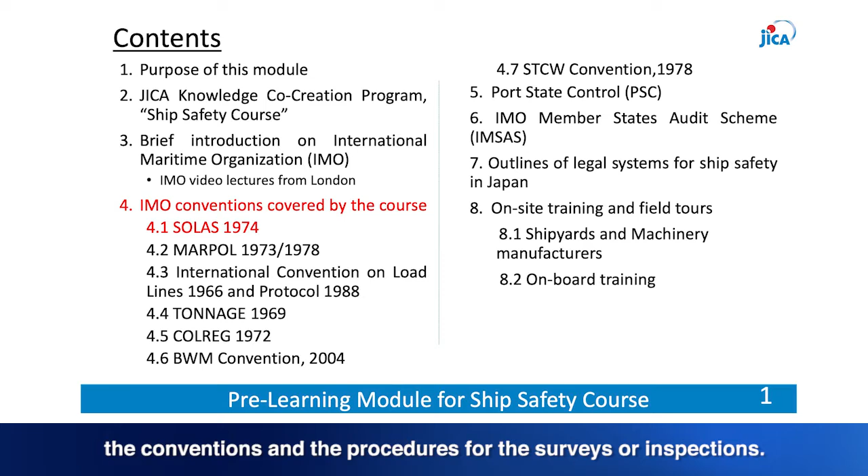Section 4 is about IMO conventions covered by the course. The background, objectives, and outlines of these conventions are briefly explained. Classroom lectures in JICA Yokohama are mostly presented by experienced surveyors or inspectors, who will provide detailed explanations regarding the requirements of the conventions and the procedures for the surveys or inspections. This part, Part 2A of the module, covers the first half of chapters 1, 2.1, 2.2, and 3 of SOLAS 1974.

4.1 SOLAS 1974, International Convention for the Safety of Life at Sea 1974. SOLAS is the most important convention for ship safety. The picture shows the SOLAS book, which was newly published by IMO. In classroom lectures, we shall be using this book. JICA will prepare the rulebooks containing IMO conventions for all participants. The slide also provides an overview of Section 4.1 of SOLAS 1974.

4.1.1 Background. 4.1.2 History of Amendments to SOLAS 1974. 4.1.3 Outline of SOLAS 1974.

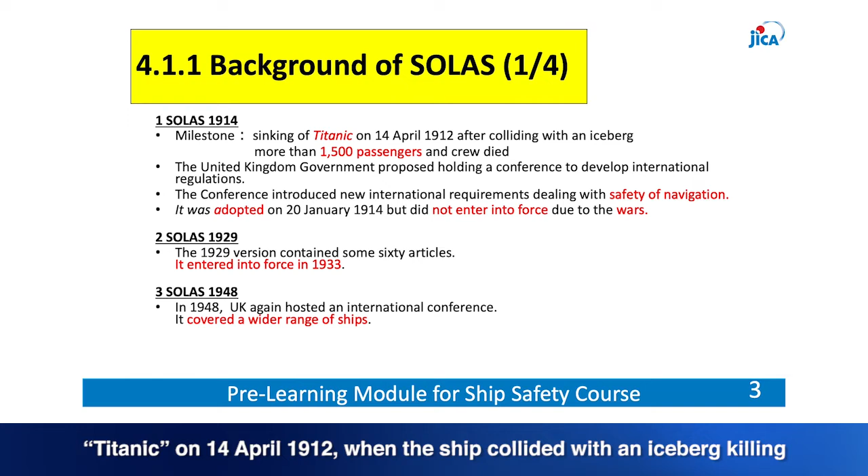This slide provides a brief historical background of SOLAS. The first version, SOLAS 1914, was introduced after the sinking of Titanic on 14 April 1912, when the ship collided with an iceberg, killing more than 1,500 passengers and crew. The government of the UK proposed holding a conference to develop international regulations.

The conference introduced new international requirements relating to navigational safety. Although the convention was adopted on 20th January 1914, it did not enter into force due to the wars. Many lives were lost in the First World War. However, it ushered in numerous technological innovations for ship safety and led to the introduction of a new convention, the 1929 version of SOLAS.

It contained some 60 articles and came into force in 1933. The Second World War further introduced several technological innovations. In 1948, the UK hosted an international conference to formulate a new convention that covers a wider range of ships, such as cargo ships. In order to keep up with the rapid developments of the industry, the 1960 convention was adopted on 17 June 1960 and entered into force on 26 May 1965. The intention was to keep the convention up to date.

However, the amendment procedure proved to be very slow, as the amendment procedure adopted was the so-called explicit style. It needed to be accepted by 2/3 of the parties before entering into force.

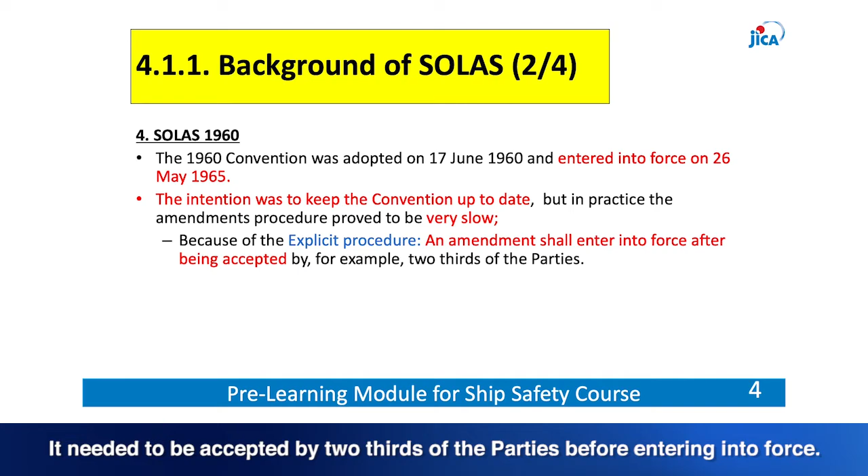5. SOLAS 1974. The SOLAS 1974 conference was held in London and attended by 71 countries. The current version of the convention was adopted there. It is unlikely to be replaced by a new instrument, because it includes a new procedure, so-called tacit amendment procedure, in Article 8. The tacit acceptance procedure is designed to ensure that changes could be made within a specified short period of time. Instead of requiring 2/3 of the parties, the tacit acceptance procedure provides that an amendment shall enter into force on a specified date unless objections to the amendment are raised by an agreed number of parties.

Consequently, the 1974 convention, which entered into force on 25 May 1980, has been updated and amended on numerous occasions. However, please note that this tacit acceptance procedure is adopted for amendments to the Annex other than those on Chapter 1. These chapters provide various technical standards, and they have been maintained and updated by this amendment procedure. On the other hand, the articles of the Convention and the regulations of Chapter 1 shall not be amended by the tacit acceptance procedure, and they are still under the explicit acceptance procedure, which needs 2/3 of the member states' acceptance to become effective.

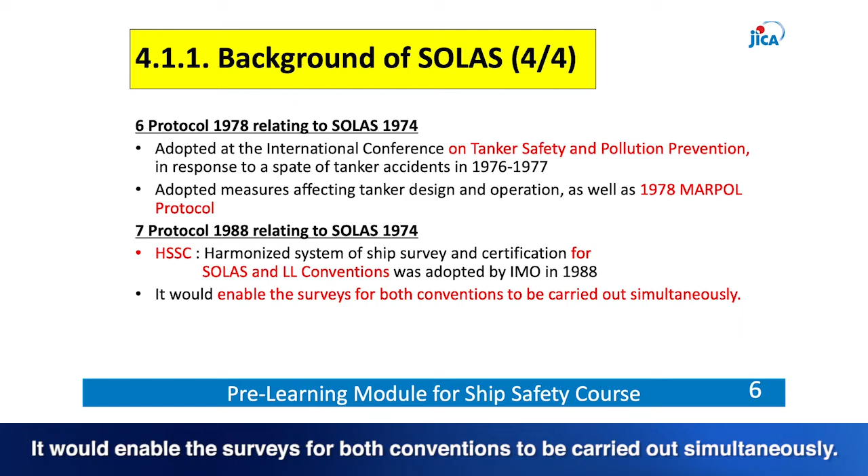The Protocol 1978 relating to SOLAS 1974 made numerous important changes to Chapter 1, including the introduction of an unscheduled inspection system, mandatory annual surveys, and the strengthening of port state control requirements. The Protocol 1988 relating to SOLAS 1974 is the protocol that was introduced to harmonise the survey and certification system of SOLAS and the Load Line Convention. It would enable the surveys for both conventions to be carried out simultaneously.

Let us examine some of the ones indicated in red. The 1983 amendment included major changes to life-saving appliances and introduced the IBC Code, International Bulk Chemical Code for chemical tankers, and the IGC Code, International Gas Carrier Code for gas carriers.

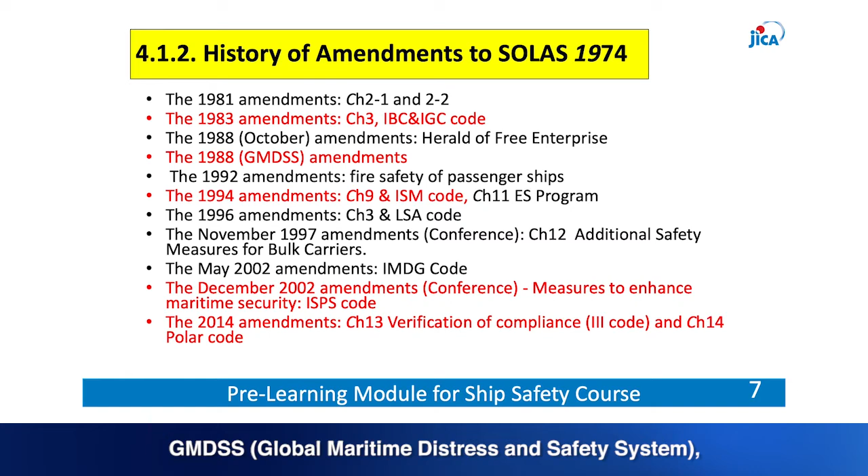The 1988 amendment introduced GMDSS, Global Maritime Distress and Safety System, which replaced traditional radio equipment that used Morse code.

The 1994 amendment introduced the ISM Code, International Safety Management Code. The 2002 amendment introduced the ISPS Code, International Code for Security of Ships and of Port Facilities, in response to the September 11 attacks in the United States.

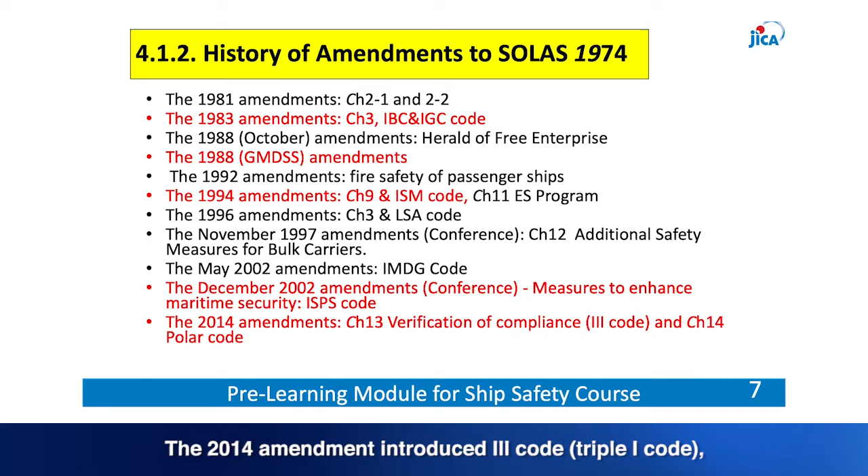The 2014 amendment introduced the III Code, IMO Instrument Implementation Code for IMO Member States Audit Scheme, and the Polar Code for ships operating in the Antarctic and Arctic.

Let me remind you about the amendment procedures again. The articles and the regulations of Chapter 1 shall not be amended by the tacit acceptance procedure, but by the explicit acceptance procedure, which needs acceptance by 2/3 of the parties, because it is designed to maintain the basic structure of the Convention. Chapter 1 provides general provisions for the annex of this Convention. All other chapters provide various technical requirements.

Article 8 of SOLAS 1974 may be considered a grandfather clause. As it states, any amendment to the present convention made under this article, which relates to the structure of a ship, shall apply only to ships whose keels are laid on or after the date on which the amendment enters into force.

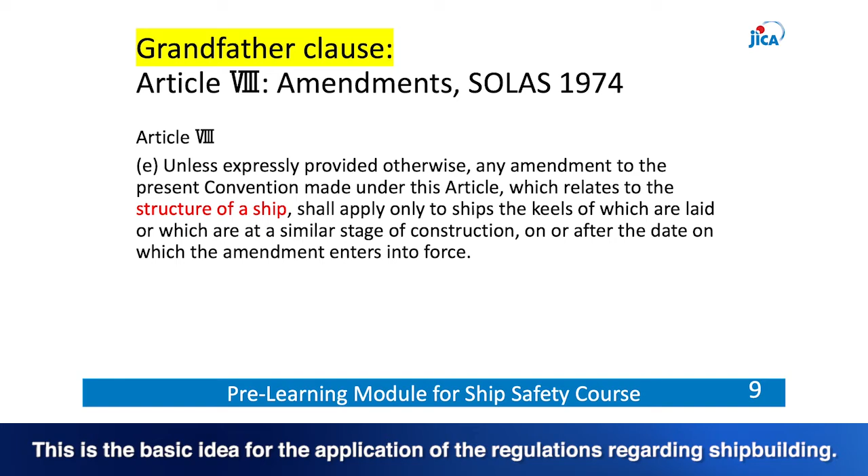In other words, the amendments to the construction shall not apply to ships which were built before the date. The previous provisions relating to the structure of the ship are still applicable to ships built before that date. However, new amendments to equipment or fitting may apply to ships which were built before the date. This is the basic idea for the application of regulations regarding shipbuilding.

4.1.4 SOLAS Chapter 1, General Provisions. Chapter 1 provides general provisions for the annex of this convention. The slide shows the structure as follows. Part A: application of the convention and definitions of the words used in the regulations.

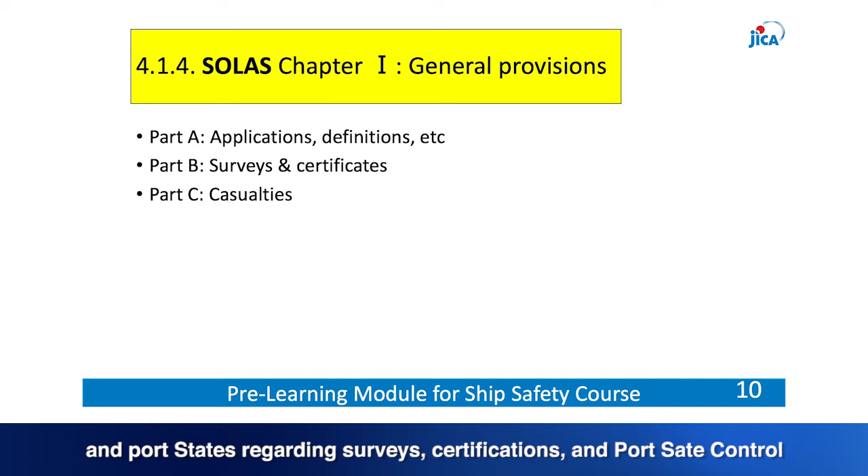Part B: surveys and certification system, which provides the duties of flag state administrations and port states regarding surveys, certifications, and port state control. Part C provides casualty investigation as a duty of each administration.

Regulation 1, Application. Unless expressly provided otherwise, the present regulations of the Annex apply only to ships engaged in international voyages. Regulation 2 provides definitions.

Please note that these are important definitions. A passenger ship is a ship which carries more than 12 passengers. A cargo ship is any ship which is not a passenger ship. A tanker is a cargo ship constructed or adapted for the carriage in bulk of liquid cargoes of an inflammable nature. A fishing vessel is a vessel used for catching fish, whales, or other living resources of the sea.

New ship means a ship the keel of which is laid, or which is at a similar stage of construction, on or after 25th May 1980. Existing ship means a ship which is not a new ship. Anniversary date is the day and month of each year which corresponds to the date of expiry of the relevant certificate.

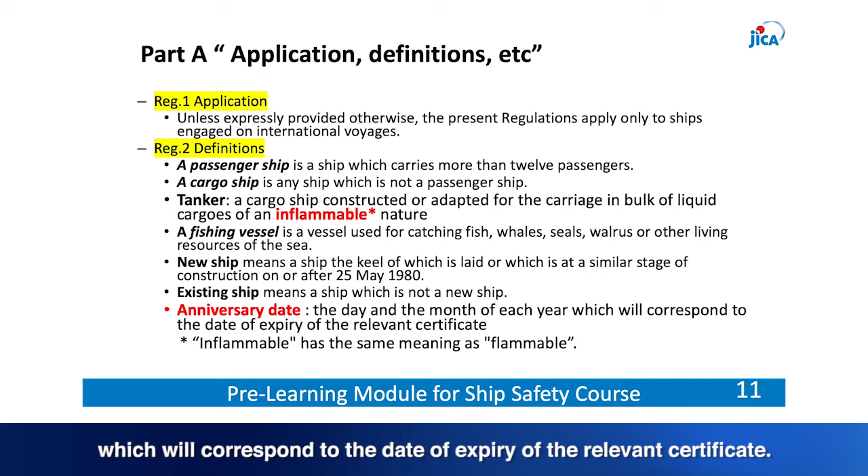Regulation 3, Exceptions. The present regulations, unless expressly provided otherwise, do not apply to: 1. Ships of war and troop ships. 2. Cargo ships of less than 500 gross tonnage. 3. Ships not propelled by mechanical means. 4. Wooden ships of primitive build. 5. Pleasure yachts not engaged in trade. 6. Fishing vessels.

Regulation 6 is Inspection and Survey. The inspection and survey of ships shall be carried out by officers of the administration. The administration may also delegate this to surveyors of recognised organisations.

The administration shall, as a minimum, empower the surveyors to: 1. Require repairs to a ship. 2. Carry out inspections and surveys if requested by the authorities of a port state.

When the surveyor determines that the ship is unfit to proceed to sea, the surveyor shall immediately ensure that corrective action is taken and notify the administration. In every case, the administration shall fully guarantee the completeness and efficiency of the inspection and survey.

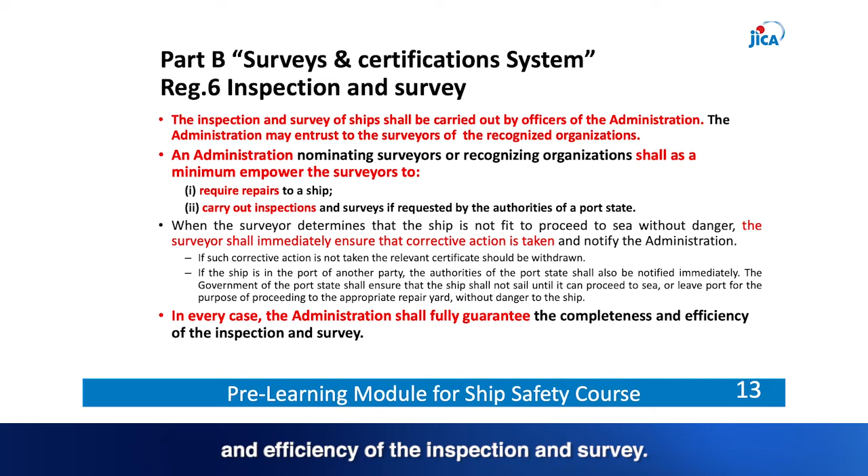Regulation 7, Surveys of Passenger Ships. The slide shows the typical survey schedule of a passenger ship. Passenger ships shall be subject to:

1. Initial survey, IS, before the ship is put into service. 2. Renewal survey, RS, once every 12 months. 3. Additional surveys, whenever any important repairs or renewals are made.

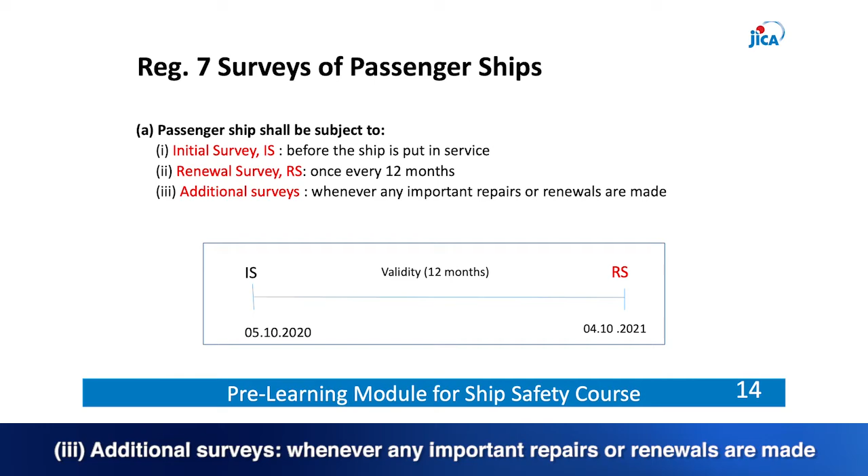Regulation 8: Surveys of life-saving appliances and other equipment of cargo ships. The slide shows the typical survey schedule of a cargo ship regarding the cargo ship safety equipment certificate.

Cargo ships of 500 gross tonnage and upwards shall be subject to: 1. Initial survey, before the ship is put into service. 2. Renewal survey, at intervals specified by the administration but not exceeding 5 years.

3. Periodical survey, within 3 months before or after the second anniversary date, or within 3 months before or after the third anniversary date of the cargo ship safety equipment certificate.

4. Annual survey, within 3 months before or after each anniversary date of the cargo ship safety equipment certificate. 5. Additional survey, whenever any important repairs or renewals are made.

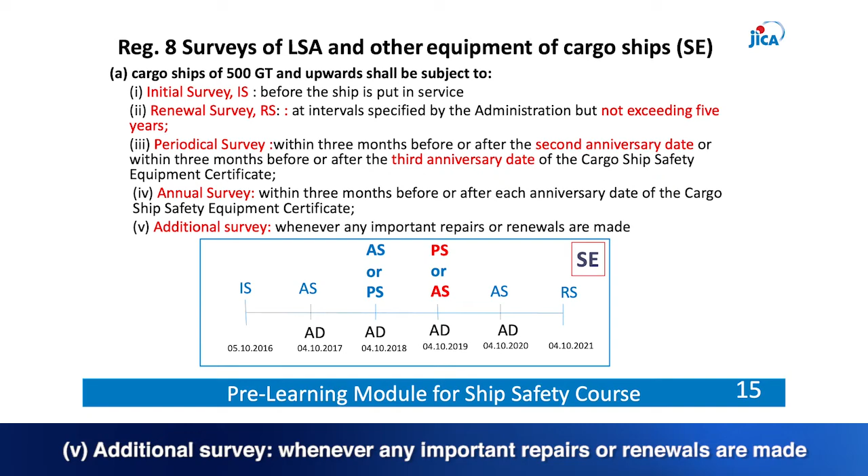Regulation 9: Surveys of radio installations of cargo ships. The slide shows the typical survey schedule of a cargo ship regarding the cargo safety radio certificate.

Cargo ships to which Chapters 3 and 4 apply, 300 gross tonnage and upwards, shall be subject to initial survey, renewal survey, periodical survey, and additional survey as required.

Regulation 10: Surveys of structure, machinery, and equipment of cargo ships. The slide shows the typical survey schedule of a cargo ship regarding the cargo safety construction certificate.

Cargo ships of 500 gross tonnage and upwards shall be subject to initial survey, renewal survey, intermediate survey, annual survey, and additional survey as required.

Special attention should be paid to the provision of 2 inspections of the outside of the ship's bottom during the 5-year period.

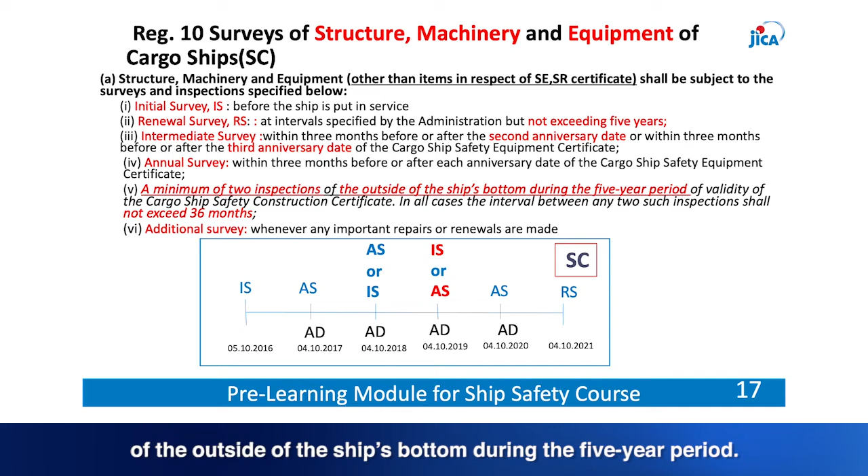Regulation 11: Maintenance of conditions after survey. A. The condition of ship and equipment shall be maintained in all respects to proceed to sea without risking danger to the ship. B. No change shall be made without the administration's approval.

C. Whenever an accident occurs to a ship or a defect is discovered which affects the safety of the ship, the master or owner shall report to the administration and the RO responsible for issuing the relevant certificate. If the ship is in a port, the appropriate authorities of the port state shall ascertain that such a report has been made.

Regulation 12: Issue or endorsement of certificates. Certificates shall be issued after an initial survey or a renewal survey: a Passenger Ship Safety Certificate, a Cargo Ship Safety Construction Certificate (SC), Cargo Ship Safety Equipment Certificate (SE), and Cargo Ship Safety Radio Certificate (SR), or Cargo Ship Safety Certificate (CS) as an alternative to SC, SE and SR.

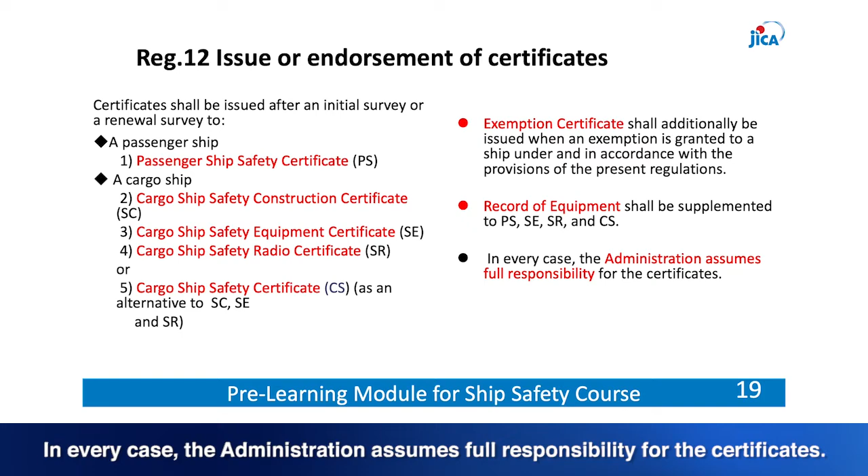Exemption Certificate shall additionally be issued when an exemption is granted to a ship under and in accordance with the provisions of the present regulations. Record of Equipment shall be supplemented to PS, SE, SR and CS. In every case, the administration assumes full responsibility for the certificates.

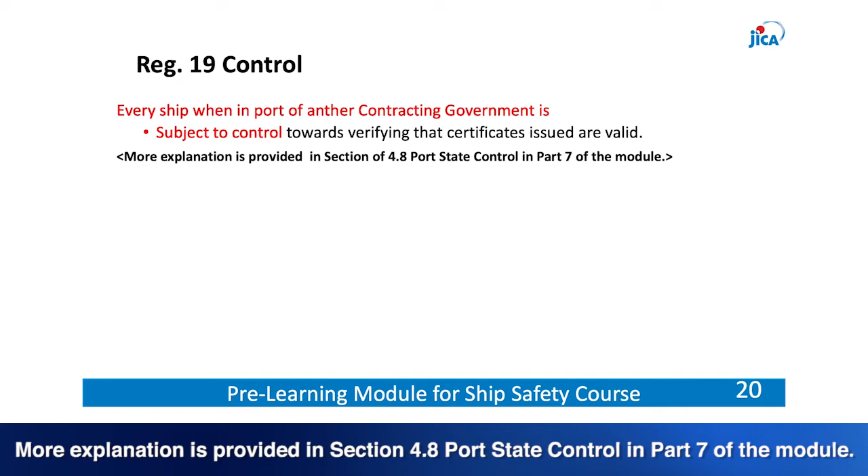Regulation 19: Control. Every ship, when in port of another contracting government, is subject to control. More explanation is provided in Section 4.8, Port State Control, in Part 7 of the module.

Regulation 21: Casualties. Each administration undertakes to conduct an investigation of any casualty occurring to any of its ships when it judges it may assist in determining what changes in the present regulations might be desirable. In addition to this provision, the investigation shall be conducted in accordance with the provisions of the Casualty Investigation Code, provided by Regulation 6 in Chapter 11.1.

SOLAS Chapter 2.1 covers construction: structure, subdivision and stability, machinery and electrical installations. The chapter covers the areas listed in the slide.

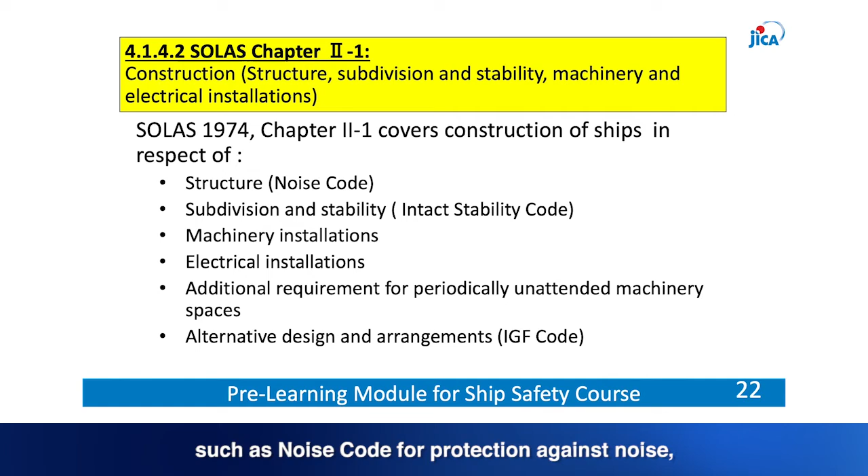The chapter also provides the mandatory codes such as the Noise Code for protection against noise, the Intact Stability Code for the minimum requirements of ship stability, and the IGF Code for safety of ships using gases or other low flashpoint fuels.

Regulation 3-1 includes additional requirements other than the regulations in this convention. Ships shall be designed, constructed and maintained in compliance with structural, mechanical and electrical requirements of a recognized classification society, or with applicable national requirements of an administration's structural, mechanical and electrical requirements for ships.

The slide shows the difference between the definitions for weathertight and watertight, and the doors equipped above and under the freeboard deck.

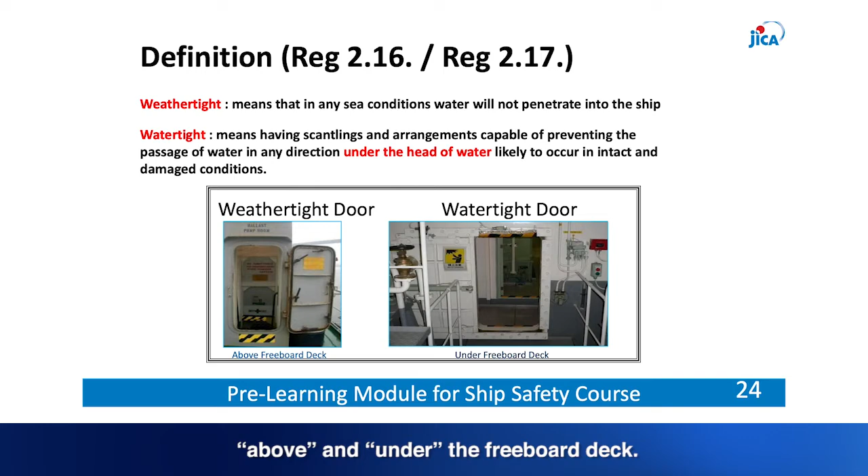Regulation 3-3: Safe Access to Tanker Bows. Every tanker shall be provided with means to enable the crew to gain safe access to the bow, even in severe weather conditions. In this regulation, tankers means oil tankers, chemical tankers, and gas carriers.

Such means of access shall be fitted with shelters at intervals not exceeding 45 metres, which shall be approved by the administration based on the guidelines of resolution MSC.62(67).

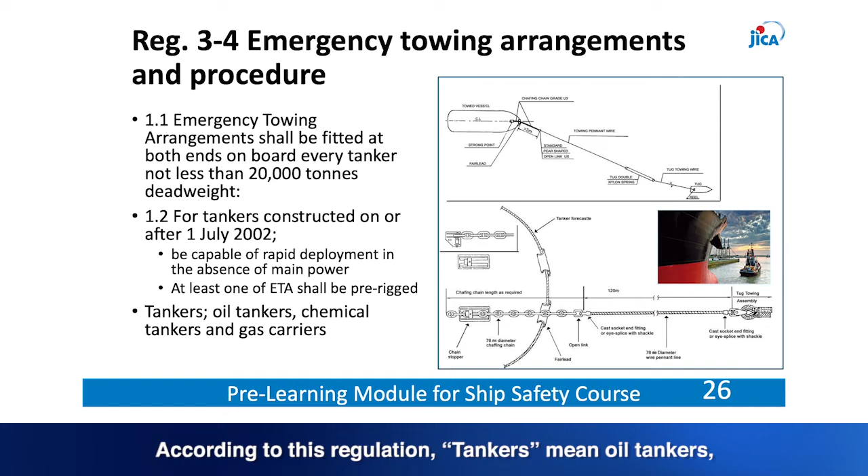Regulation 3-4, Emergency Towing Arrangements and Procedure. Emergency towing arrangements shall be fitted at both ends of every tanker not less than 20,000 tons deadweight. For tankers constructed on or after 1 July 2002, it shall be capable of rapid deployment in the absence of main power. At least one emergency towing arrangement shall be pre-rigged for urgent use. According to this regulation, tankers means oil tankers, chemical tankers and gas carriers as well.

Regulation 3-8, Towing and Mooring Equipment. This regulation applies to ships constructed on or after 1 January 2007. It shall meet the appropriate requirements of the administration or a recognised organisation. Each fitting shall be clearly marked, taking into account the strength of its attachment to the ship's structure.

Regulation 3-9, Means of Embarkation on and Disembarkation from Ships. For ships constructed on or after 1 January 2010, gangways or accommodation ladders shall be constructed and installed based on the guidelines. For all ships, the means shall be inspected and maintained to ensure that it is kept in a suitable condition. All wires used to support the means shall be maintained as specified in Regulation 20.4 of Chapter 3. The wires shall be replaced at intervals of not more than 5 years.

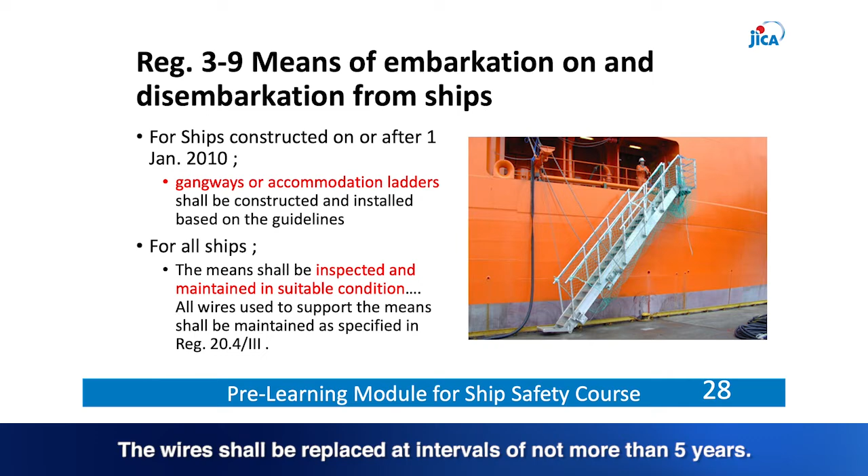Regulation 3-12, Protection against Noise. First, the Code on Noise Levels on board Ships shall apply to ships of 1,600 gross tonnage and above and delivered on or after 1 July 2018. Second, on ships delivered before 1 July 2018, measures shall be taken to reduce machinery noise in machinery spaces to acceptable levels as determined by the administration. The Code on Noise Levels on board Ships was adopted by Resolution A468(12) for reference.

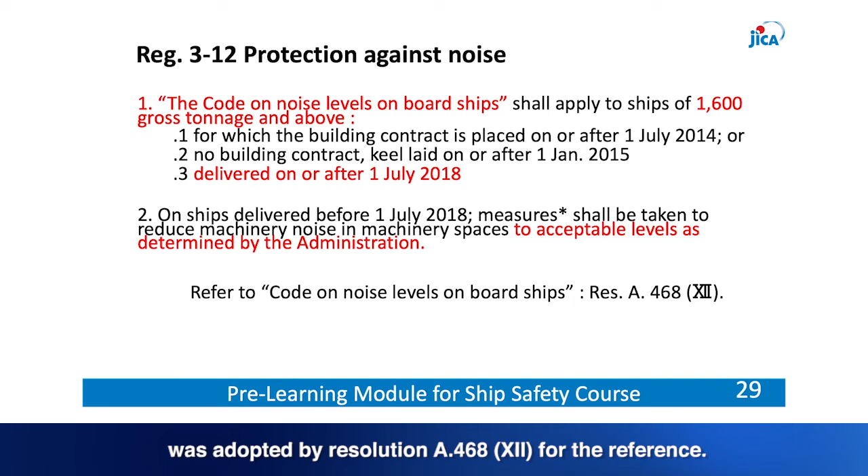Regulation 5, Intact Stability and Information. Every passenger ship, regardless of size, and every cargo ship having a length of 24 metres and upwards, shall undergo an inclination test upon completion of construction, and intact stability information shall be supplied to the master. Ships constructed on or after 1st July 2010 shall be in compliance with the requirements of Part A of the 2008 Intact Stability Code. The code provides minimum standards of ships' intact stability.

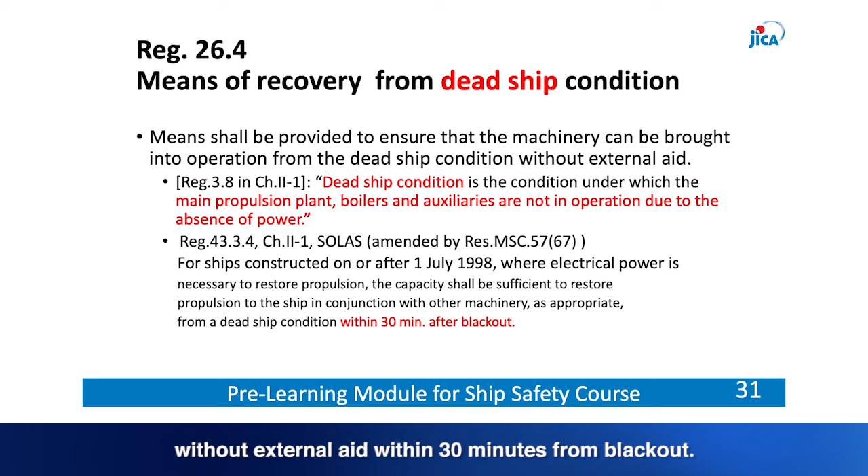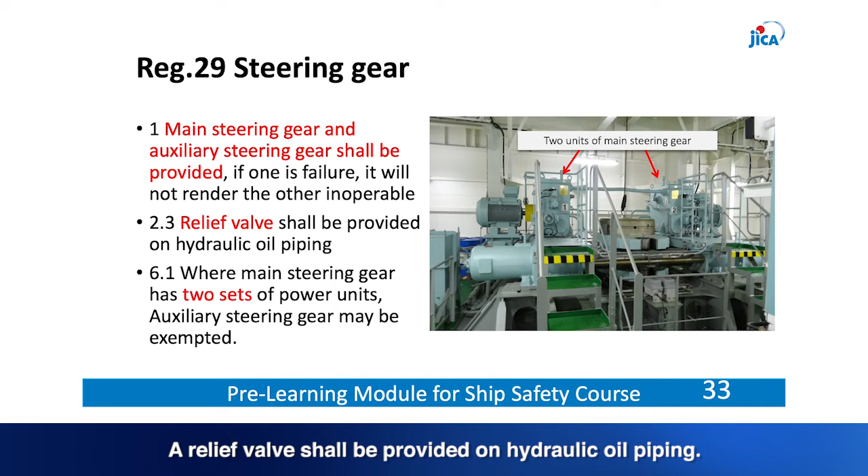Regulation 29, Steering Gear. Main steering gear and auxiliary steering gear shall be provided. A relief valve shall be provided on hydraulic oil piping. Where main steering gear has 2 sets of power units, the auxiliary steering gear may be exempted.

Regulation 43, Emergency Source of Electrical Power in Cargo Ships. A self-contained emergency source of electrical power shall be included. It shall be located above the uppermost continuous deck and readily accessible from the open deck. It shall not be located in front of the collision bulkhead. The source of emergency electrical power may be either a generator or an accumulator battery.

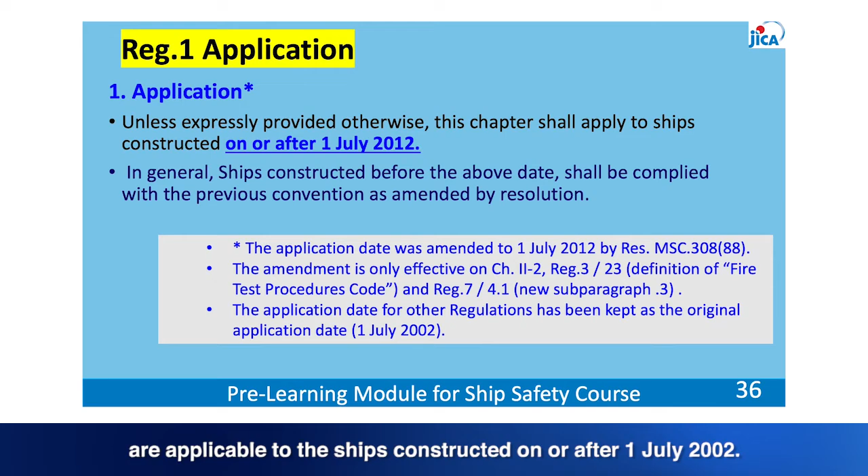Please remember the explanation regarding the grandfather clause in Chapter 1. New amendments are basically applicable to the ships which are built on or after the date when the amendments come into force. Hence, it is imperative to be aware of the amendment history.

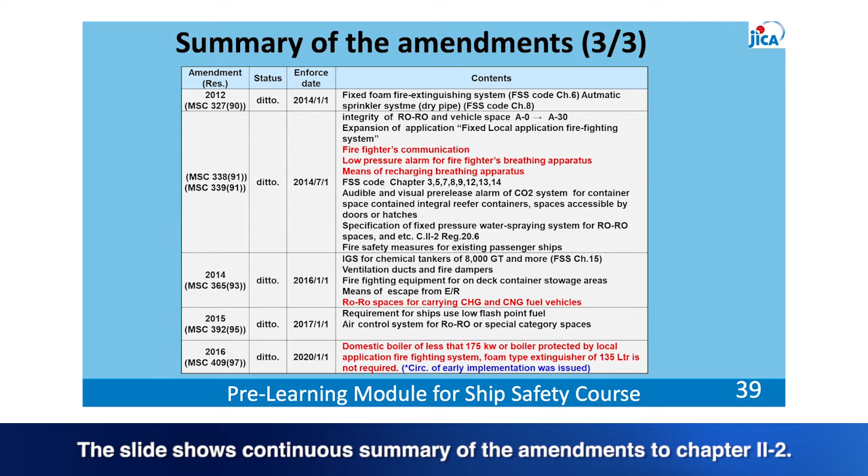Regulation 2 is the objectives of fire safety: 1. Prevent the occurrence of fire and explosion. 2. Reduce the risk to life caused by fire. 3. Reduce the risk of damage caused by fire to the ship, its cargo, and the environment. 4. Contain, control, and suppress fire and explosion in the compartment of origin. 5. Provide adequate and readily accessible means of escape for passengers and crew.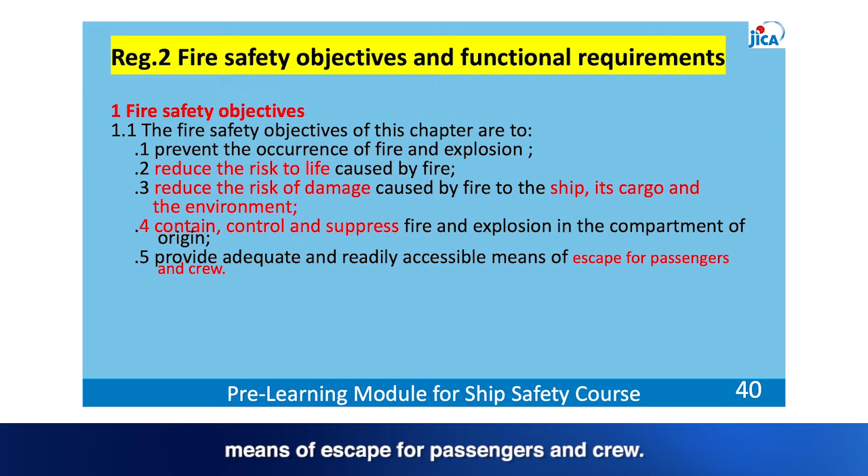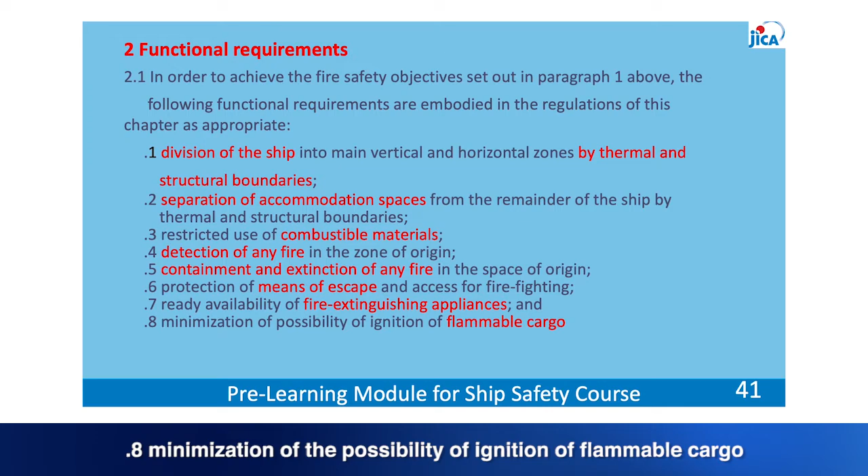In paragraph 2, the functional requirements are listed to achieve the fire safety objectives in paragraph 1. These functional requirements are embodied in the regulations of this chapter: 1. Division of the ship by thermal and structural boundaries. 2. Separation of accommodation spaces. 3. Restricted use of combustible materials. 4. Detection of any fire. 5. Containment and extinction of any fire. 6. Protection of means of escape. 7. Availability of fire-extinguishing appliances. 8. Minimization of the possibility of ignition of flammable cargo.

Regulation 3, Definitions. 22. Fire Safety Systems Code (FSS Code) means the International Code for Fire Safety Systems as adopted by Resolution MSC 98(73). The purpose of this code is to provide international standards of specific engineering specifications for fire safety systems required by Chapter 2-2 of SOLAS 1974.

23. Fire Test Procedures Code (FTP Code) means the International Code for Application of Fire Test Procedures as adopted by Resolution MSC 61(67). This code is intended for use by the administration and the competent authority of the flag state when approving products for installation in ships flying the flag of the flag state in accordance with the fire safety requirements of SOLAS 1974. The code shall be used by testing laboratories when testing and evaluating products under this code.

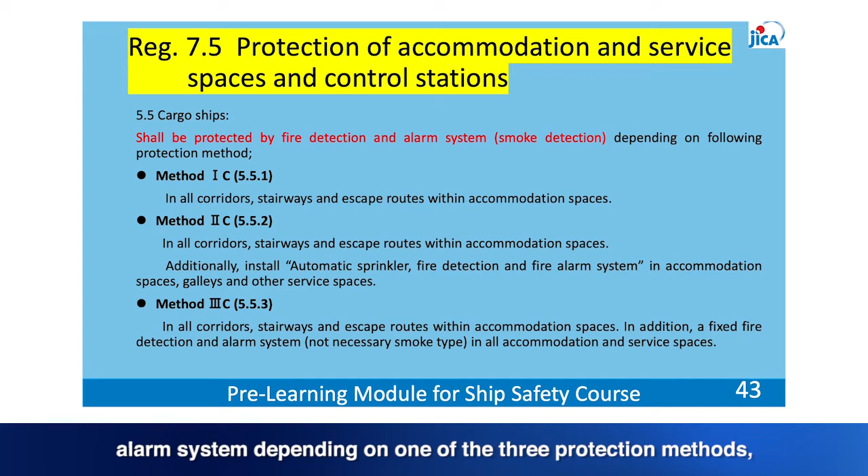Regulation 7.5 is protection of accommodation and service spaces and control stations for cargo ships. Cargo ships shall be protected by installing fire detection and alarm systems depending on one of three protection methods: Method 1C, Method 2C, or Method 3C.

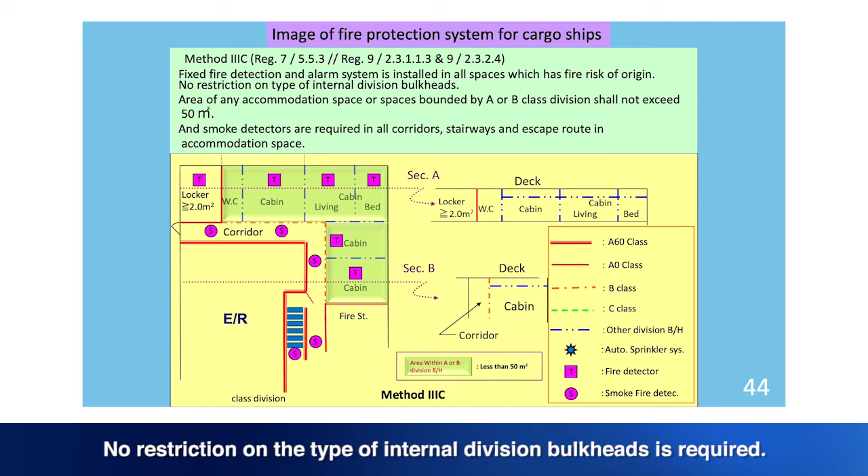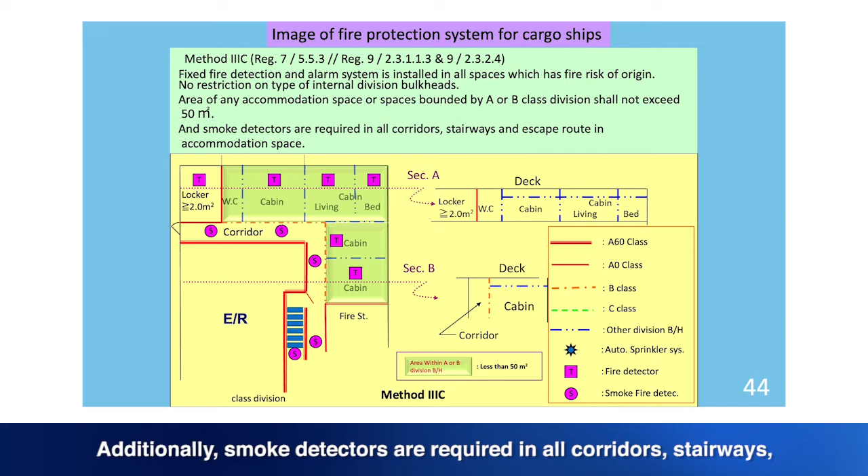The slide shows a typical image of a fire protection system for the accommodation space of a cargo ship with Method 3C. A fixed fire detection and alarm system is installed in all spaces which have risk of fire origin. No restriction on the type of internal division bulkheads is required. The area of any accommodation spaces bounded by Type A or B class division shall not exceed 50 square metres. Additionally, smoke detectors are required in all corridors, stairways, and escape routes of the accommodation space.

Regulation 10 is firefighting. The purpose of this regulation is to suppress and swiftly extinguish a fire at its origin. For this purpose, the following functional requirements shall be met: 1. Fixed fire-extinguishing systems shall be installed having due regard to the fire growth potential of the protected spaces, and 2. Fire-extinguishing appliances shall be readily available.

Regulation 10.2 is water supply systems. Ships shall be provided with fire pumps, fire mains, hydrants and hoses, complying with the applicable requirements of this regulation. The slide shows the requirements for fire mains and hydrants. The pipes and hydrants shall be so placed that the fire hoses may be easily coupled to them. The arrangement shall be made in such a manner to avoid the possibility of freezing. Suitable drainage provisions shall be provided for fire main piping. In ships where deck cargo may be carried, the positions of the hydrants shall be such that they are always readily accessible and protected to avoid risk of damage by such cargo.

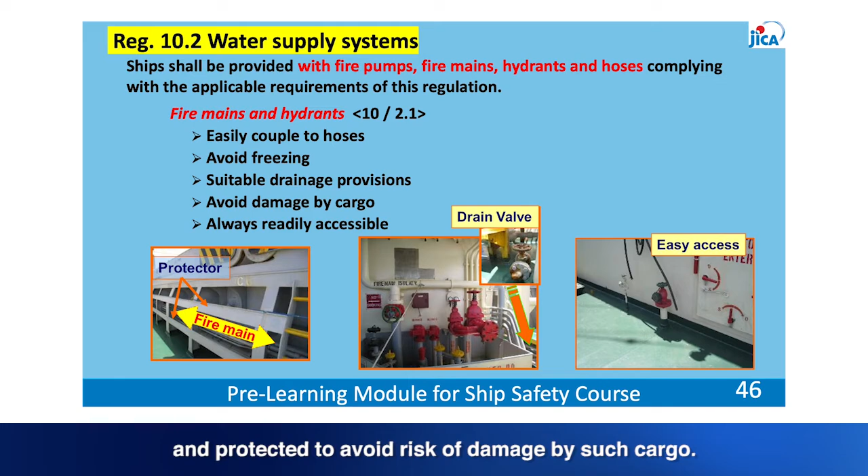2.1.4 Isolating valves. The isolating valve is installed to separate the section of fire main within the machinery space from the rest of the fire main. In case the main fire pumps in the machinery space are damaged and rendered unavailable, water can be delivered from the emergency fire pump equipped in another section. It shall be located at an easily accessible and tenable position outside the machinery spaces.

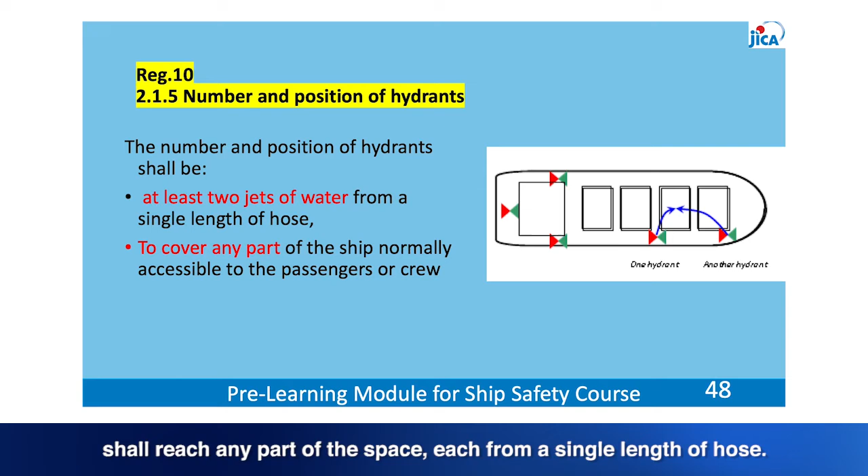2.1.5 Number and position of hydrants. The number and position of hydrants shall be such that at least 2 jets of water, not emanating from the same hydrant, one of which shall be from a single length of hose, may reach any part of the ship normally accessible to passengers or crew, and any part of any cargo space when empty, any roro space or any vehicle space, in which latter case the 2 jets shall reach any part of the space, each from a single length of hose. Furthermore, such hydrants shall be positioned near the accesses to the protected spaces.

2.1.7 International Shore Connection. Ships of 500 gross tonnage and upwards shall be provided with at least one international shore connection complying with the Fire Safety Systems Code. Such a connection is to be used on either side of the ship. The connections enable the ship to accept the support of firefighting from shoreside.

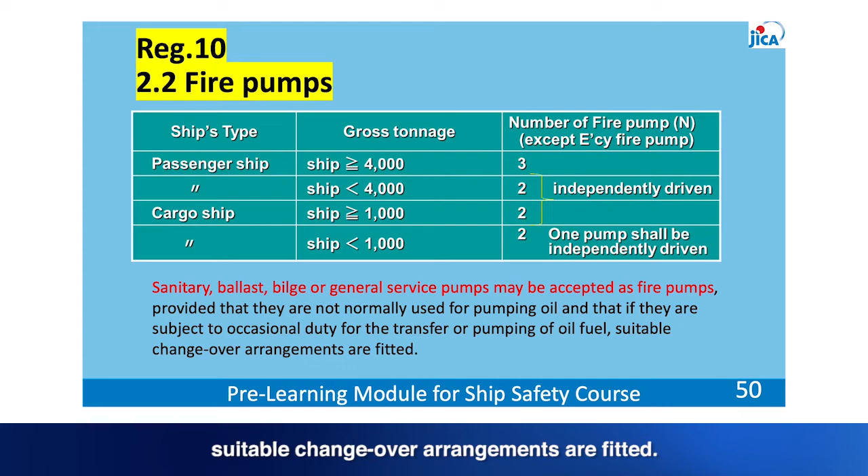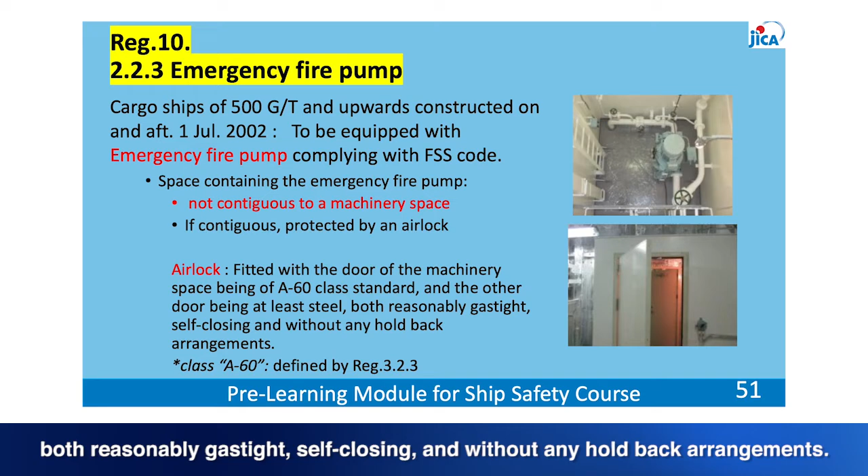Cargo ships of 500 gross tonnage and upwards constructed on or after 1 July 2002 shall be equipped with an emergency fire pump complying with the FSS code. The photo shows the space containing the emergency fire pump. It shall not be contiguous to the boundaries of machinery spaces containing main fire pumps. Where this is not practicable, it shall be protected by an airlock, with the door of the machinery space being of A60 class standard, and the other door being at least steel, both reasonably gas-tight, self-closing, and without any hold-back arrangements.

This slide is on fire hoses and nozzles. Ships shall be equipped with an adequate number of hoses and nozzles as indicated. The fire nozzle shall be dual-purpose type, able to spray and jet, and incorporating a shut-off.

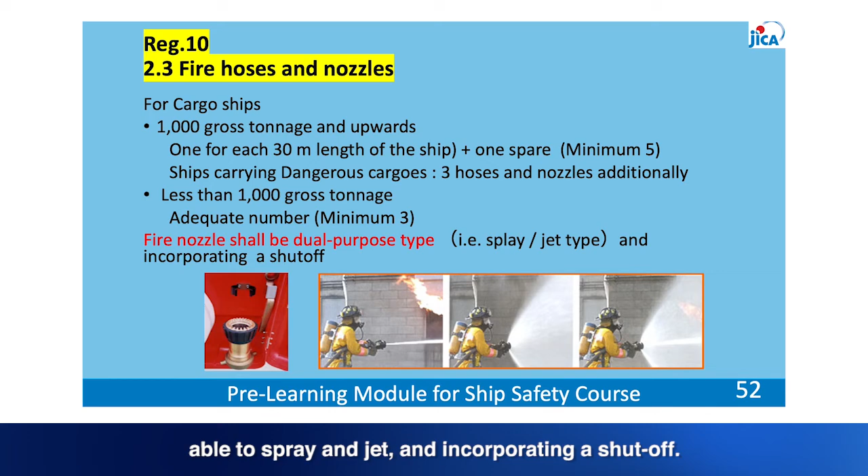Spare charges shall be provided for 100% of the first 10 extinguishers and 50% of the remaining extinguishers. The instructions for recharging shall be available on board. If it cannot be recharged on board, additional portable fire extinguishers of the same quantity, type, capacity and number shall be provided in lieu of spare charges.

There are 3 types of fixed fire extinguishing systems, namely gas, high expansion, and pressure water spraying. Machinery and cargo spaces shall be protected by one of the fixed fire extinguishing systems.

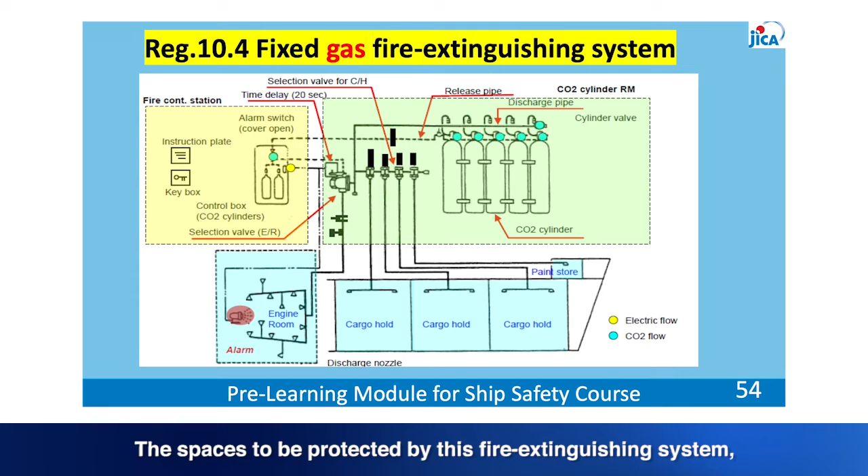This slide shows a diagram of the fixed gas fire extinguishing system. In the diagram, the gas bottles room, where the gas bottles are stored and its control system is equipped, is indicated in light green. The gas bottles room is required as a control station for fire integrity. The spaces to be protected by this fire extinguishing system, the machinery space and the cargo spaces, are indicated in light blue. The slide shows the important requirements of the fixed gas fire extinguishing system.

The control valve of conveying pipes shall be clearly marked with the space to which the pipes lead, for example engine room, number 1 cargo hold. The automatic audible warning of released gas shall be provided. The alarm shall be automatically activated by opening the cabinet door of the control units for at least 20 seconds.

In the system, 2 separate controls shall be provided. The first control is used for operating the valve of the piping which conveys the gas into the protected space. The second control is used for discharging the gas from bottles. For the safety of crew, automatic release shall not be permitted. At each location, there shall be clear instructions for the operation of the system.

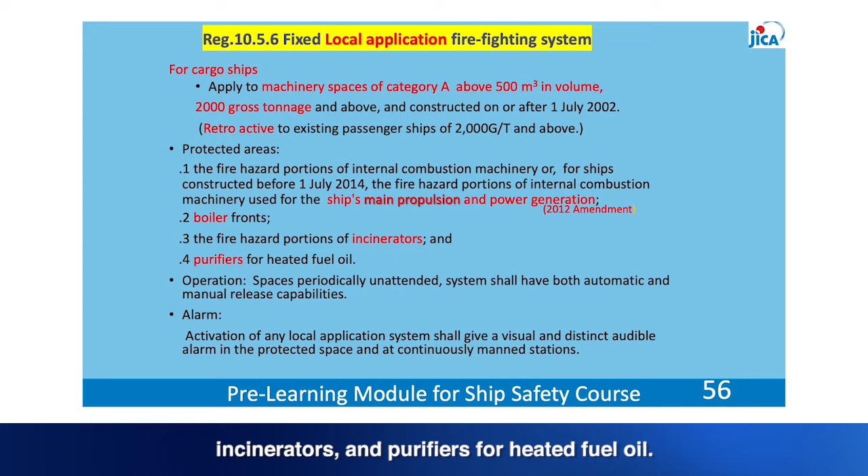The slide is Fixed Local Application Firefighting System. For cargo ships of 2,000 gross tonnage and above constructed on or after 1 July 2002, machinery spaces of Category A above 500 cubic metres in volume shall be protected by this system. It delivers water mist to places containing machinery with risk of fire, such as cylinder cover top of diesel engine, boiler fronts, incinerators and purifiers for heated fuel oil. In case the machinery space is periodically unattended, the system shall have both automatic and manual release capabilities. Definition of machinery spaces of Category A is provided by Regulation 3.31.

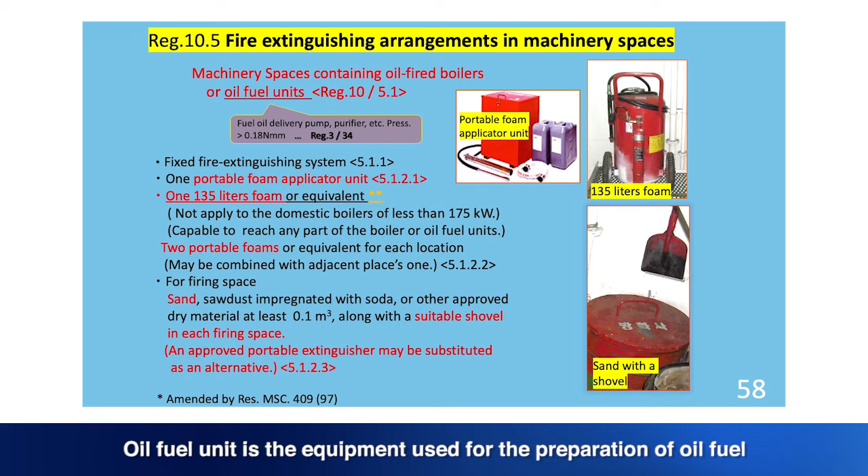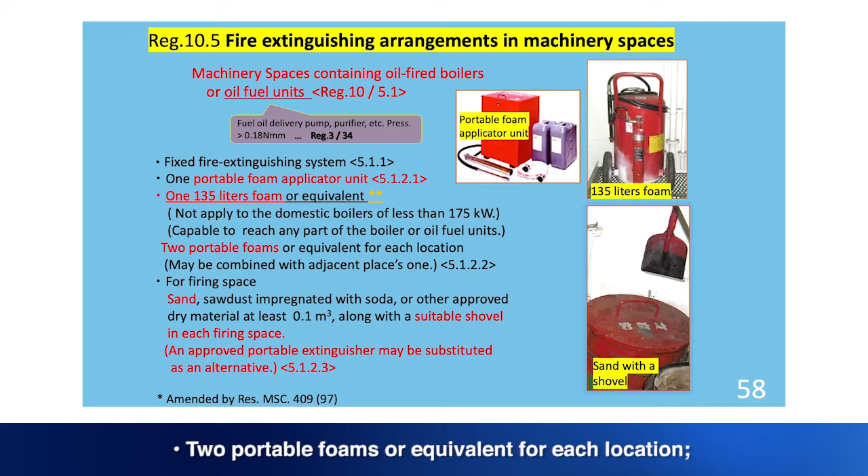The following arrangements are required for these spaces: a fixed fire extinguishing system, 1 portable foam applicator unit, 135 litres foam or equivalent, 2 portable foam extinguishers or equivalent for each location, for each firing space like boiler front. Sand, sawdust impregnated with soda, or other approved dry material along with a suitable shovel shall be provided.

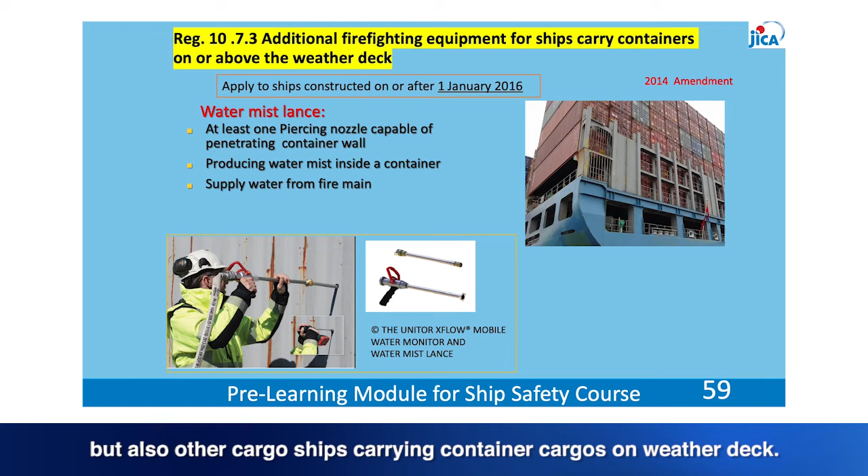This is a new requirement applicable not only to container ships but also other cargo ships carrying container cargoes on weather deck. At least one water mist lance shall be provided with a tube and a piercing nozzle, capable of penetrating a container wall and producing water mist inside a confined space, such as a container, when connected to the fire main. The slide shows another new requirement for cargo ships designed to carry 5 or more tiers of containers on or above the weather deck.

The requirement is applicable for ships constructed on or after 1st January 2016. Mobile water monitors shall be provided for fires occurring in containers stowed in high places.

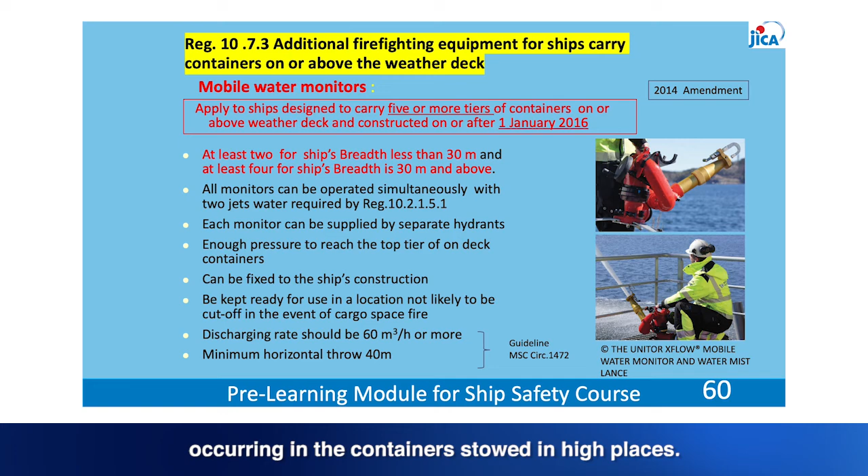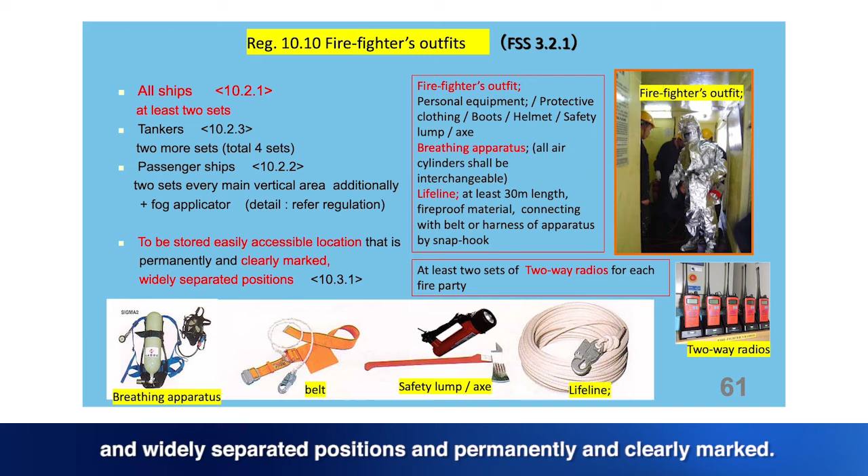The slide shows the firefighter's outfit. The outfit consists of personal equipment, protective clothing, boots, helmet, safety lamp, axe, breathing apparatus, and lifeline. Firefighters' outfits shall be stored in easily accessible and widely separated positions, permanently and clearly marked. In addition, at least 2 sets of two-way radios shall be provided for each fire party.

From the lower part of a machinery space, one of the escape routes is an escape trunk, protected by self-closing fire doors with internal dimensions measuring at least 800 by 800 mm, equipped with emergency lighting.

From machinery control rooms and main workshops, 2 means of escape shall be provided. One of these shall provide a continuous fire shelter to a safe position outside the machinery space. The requirement is applicable to ships constructed on or after 1st January 2016.

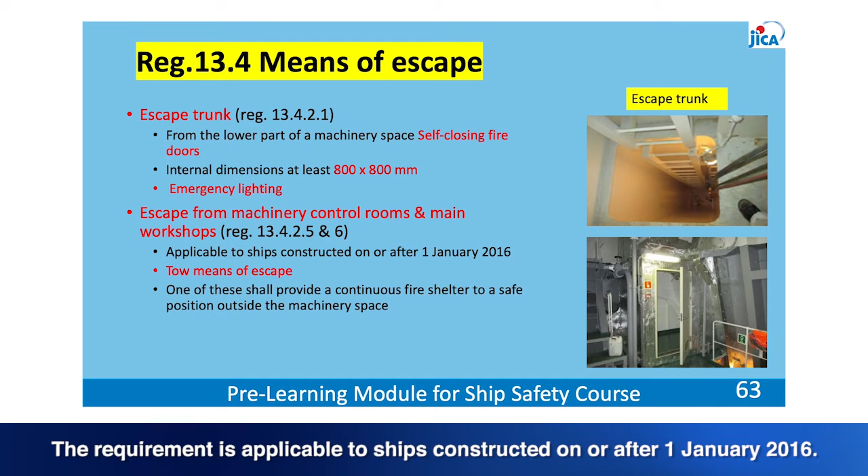LSA Code means the International Life-Saving Appliance Code. The purpose of this code is to provide international standards for life-saving appliances required by this chapter.

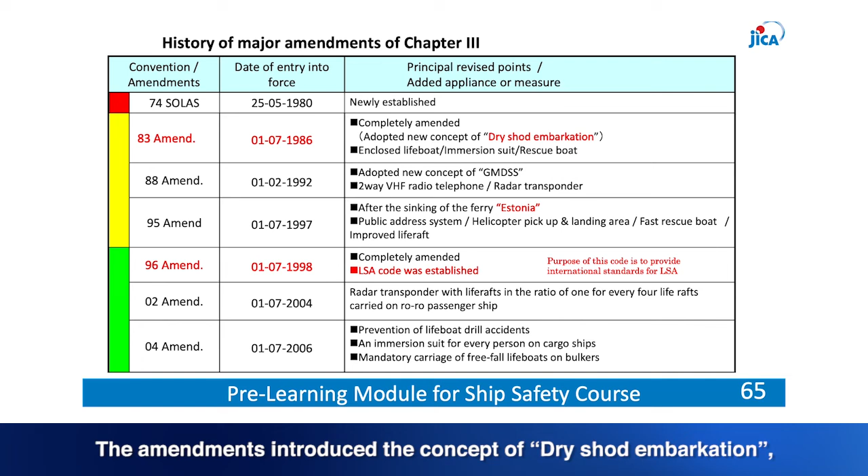The slide shows the history of major amendments of Chapter 3. The 1983 amendments came into force on 1 July 1986, introducing the concept of dry shod embarkation, which enables persons on board to survive without getting wet, and requiring enclosed-type lifeboats instead of open-type lifeboats.

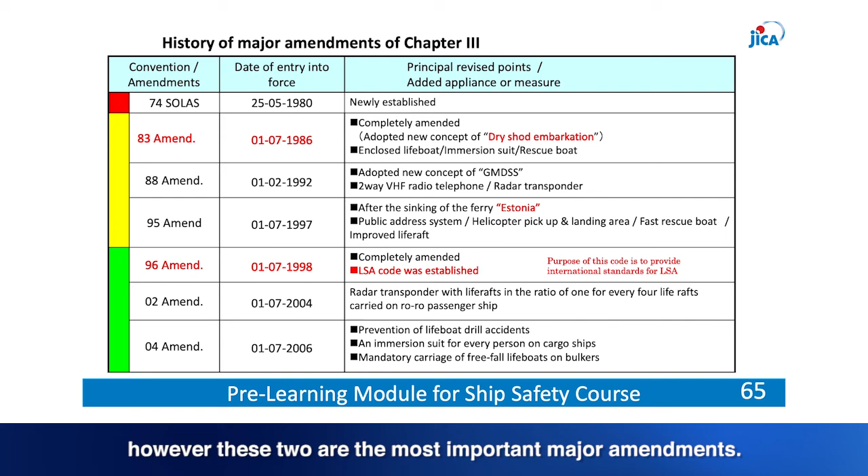The 1996 amendments came into force on 1 July 1998, introducing the LSA Code. SOLAS Chapter 3 has been frequently amended, however these 2 are the most important major amendments.

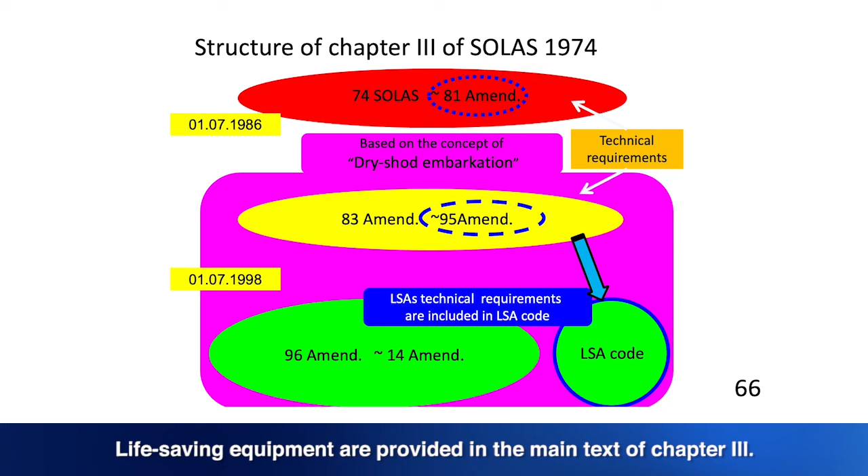The slide shows the structure of Chapter 3 of SOLAS 1974, before and after the LSA Code was introduced. The technical requirements used to be included in the main text of Chapter 3. After the introduction of the LSA Code, detailed requirements for life-saving appliances were shifted into the code, while the basic requirements for ships' life-saving equipment are provided in the main text of Chapter 3.

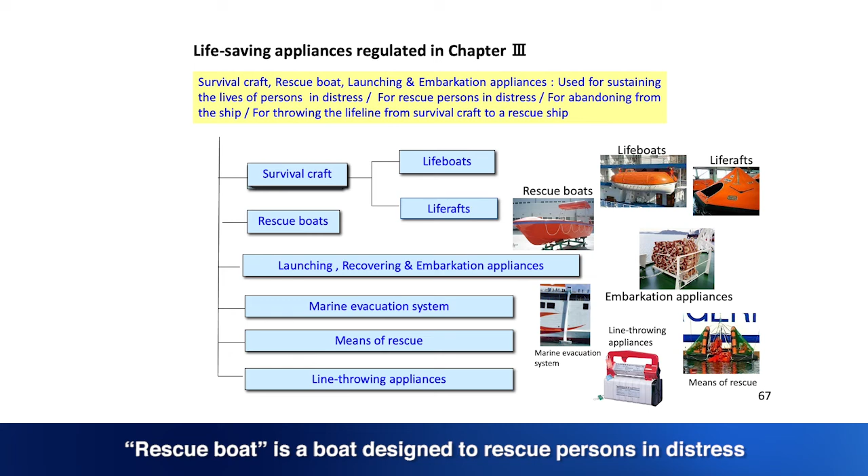The slide shows the important life-saving appliances, the definitions of which are provided in Regulation 3. From the top, survival craft is a craft capable of sustaining the lives of persons in distress from the time of abandoning the ship. Lifeboats and life rafts are the survival crafts to be equipped on ships. Rescue boat is a boat designed to rescue persons in distress and to marshal survival craft.

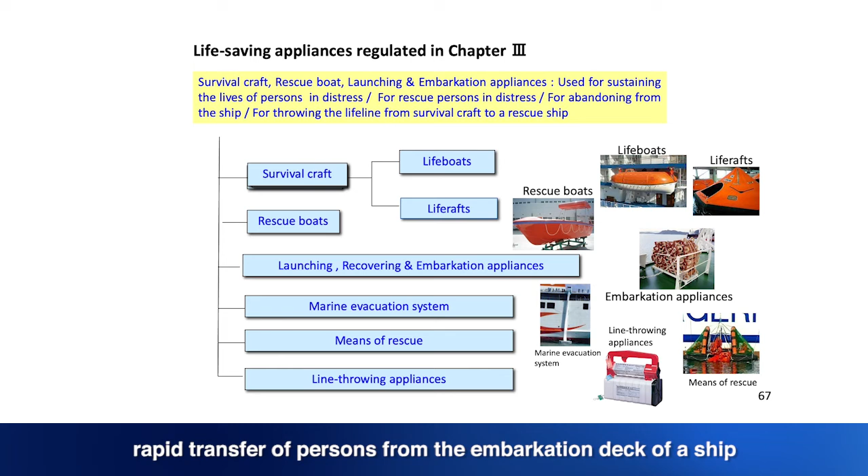Launching and recovering appliance is used for lowering and recovering the rescue boat or lifeboat. Embarkation appliance is used for transferring persons from the embarkation deck to the lifeboat. Marine evacuation system is an appliance that facilitates rapid transfer of persons from the embarkation deck of a ship to a floating survival craft.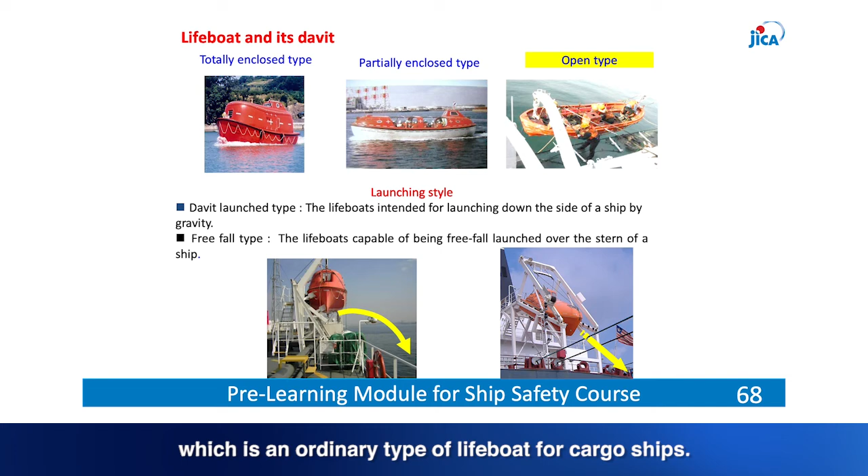At the top centre is a partially enclosed lifeboat for passenger ships, which enables quick embarkation of passengers to the boat. At the top right is an open-type lifeboat and its launching appliance. This appliance was equipped on ships constructed before 1 July 1986, although they can still be effective if maintained properly.

With regard to the types of launching appliance, the lower left is davit launching type and the lower right is freefall type. Bulk carriers, as defined in Regulation 1.6 of Chapter 9, constructed on or after 1 July 2006, shall be equipped with freefall type lifeboats.

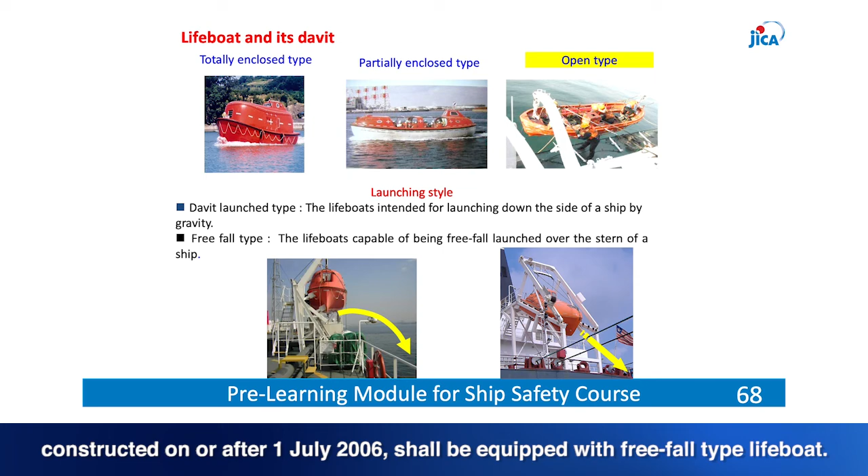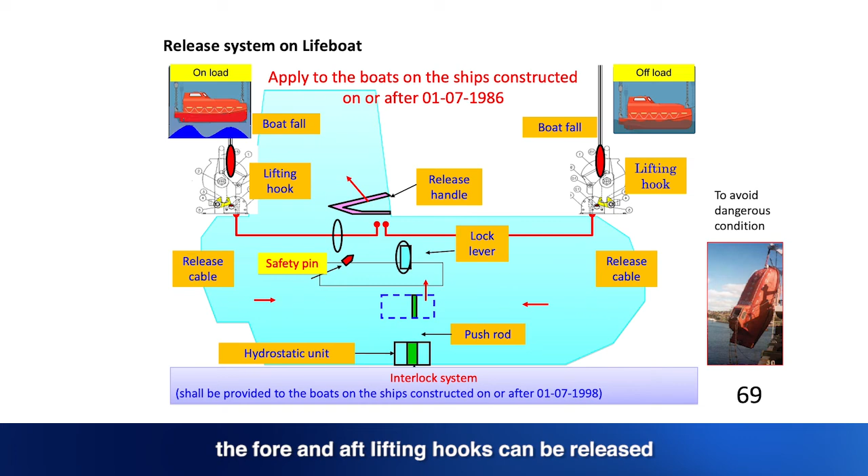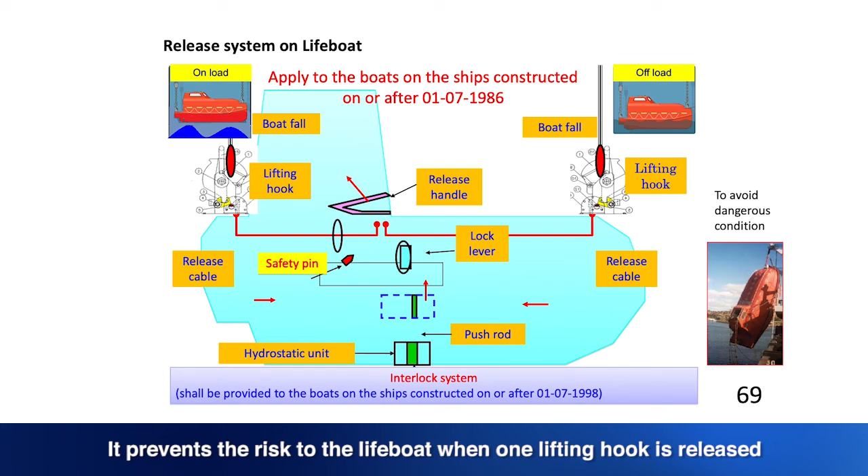It is used on special occasions, such as on rough seas. When the boat is still up in the air just above the water surface, the fore and aft lifting hooks can be released simultaneously by intentional double actions of the operators, by removing the safety pin first and then pulling the release handle. The function of the release system is to ensure that both fore and aft lifting hooks are released simultaneously. It prevents the risk to the lifeboat when one lifting hook is released while the other is still on the boat fall, creating a gravely dangerous situation where the boat is suspended in the air by only one boat fall, as shown in the photo on the slide.

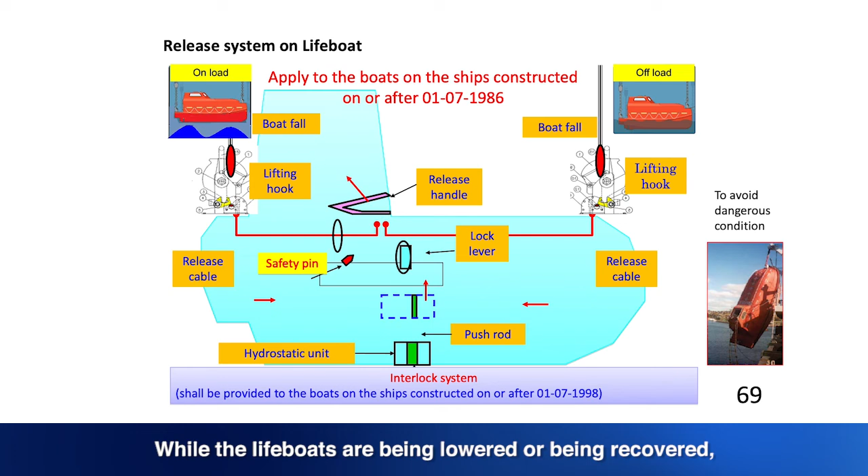Several accidents occurred due to falling lifeboats. Many of them occurred during lifeboat drills conducted by the crew. While the lifeboats were being lowered or recovered, the lifting hook was suddenly released unintentionally. Many of them occurred due to incomplete reset of the release system.

This excludes weekly or monthly inspections and routine maintenance carried out by the ship's crew. Regulation 3.25 of Chapter 3 was amended to make Resolution MSC 402/96 mandatory, coming into force on 1 January 2020.

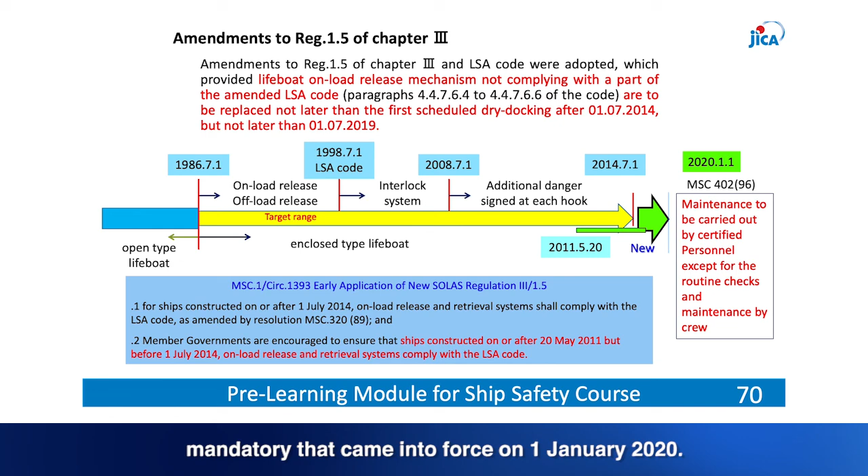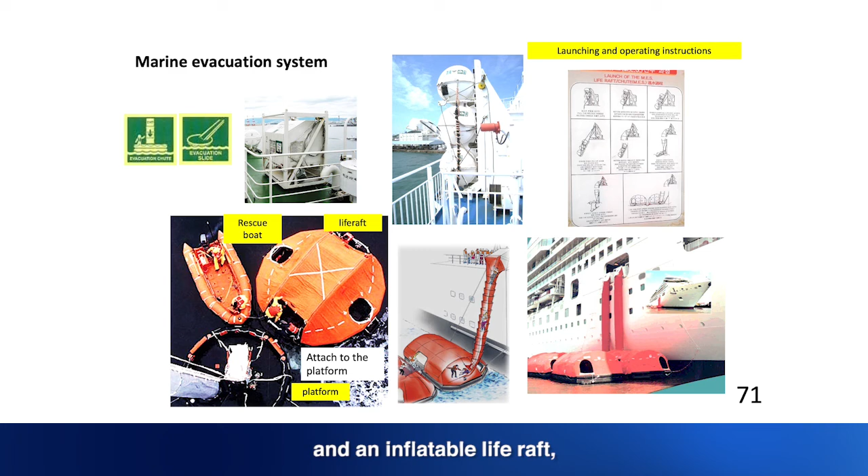The slide shows the photos of Marine Evacuation System, MES. From the top right in clockwise direction: launching and operating instructions to be posted under emergency illumination light, two types of marine evacuation system in operation, the marine evacuation system together with a rescue boat and an inflatable life raft, and the stowage condition of two types of MES with the symbol stickers.

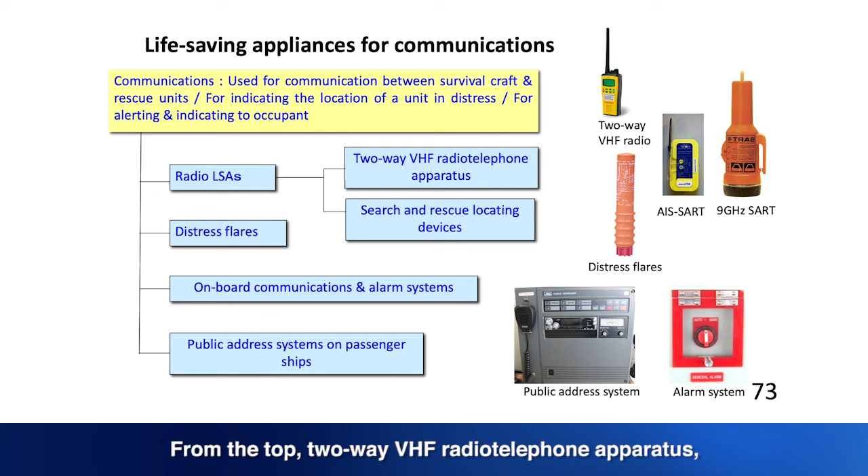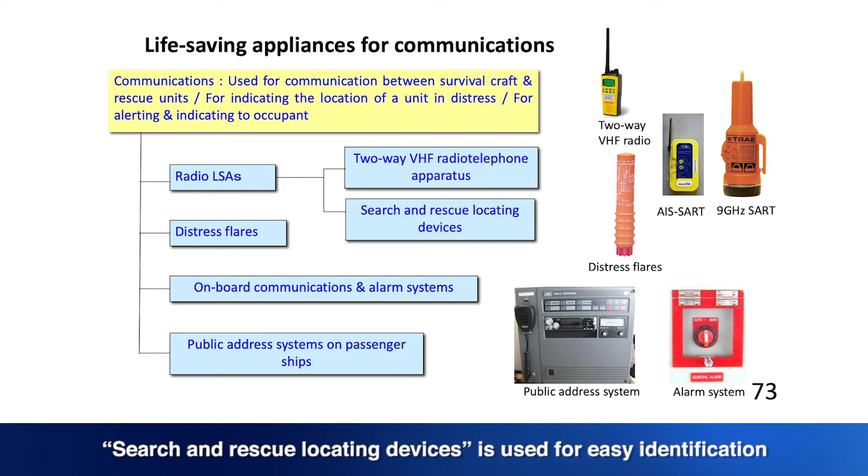The slide shows the life-saving appliances for communications. From the top, two-way VHF radio telephone apparatus capable of two-way communication on the designated channels with other survival craft in distress or rescue units. Search and rescue locating devices are used for easy identification of the position of survival craft in distress.

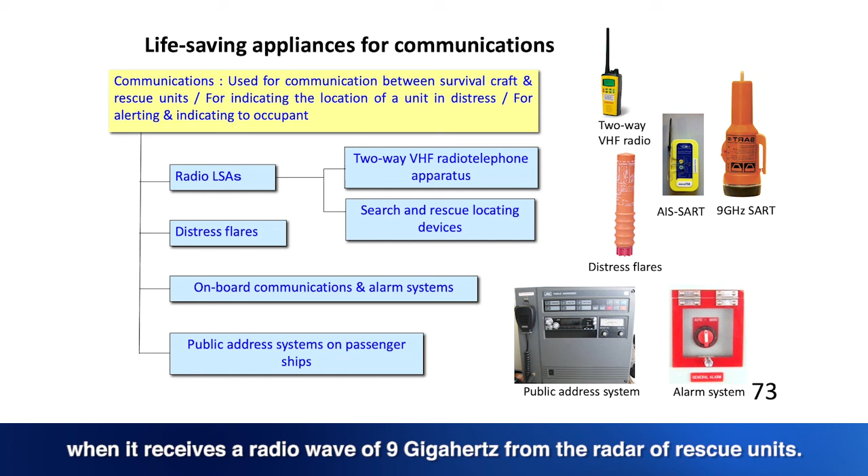Ships shall be equipped with either a 9 GHz search and rescue transponder (9 GHz SART) or an AIS search and rescue transponder. The 9 GHz SART transmits radio signals to indicate the position of the device on the radar screen of rescue units when it receives a radio wave of 9 GHz from the radar of rescue units. As for AIS SART, it transmits an AIS signal with information on the current position obtained by its GPS. The rescue units will receive the information to locate the position of the device by AIS, which includes the range and direction of the position of the device.

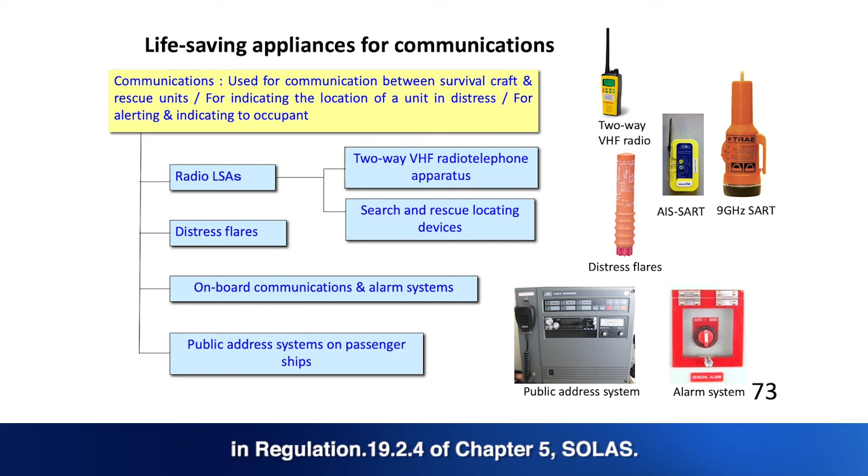AIS stands for Automatic Identification System. It is one of the navigational equipment mentioned in Regulation 19.2.4 of Chapter 5, SOLAS. It is explained in the next module, Part 2B.

Distress flares is the rocket parachute flare provided in Chapter 3 of the LSA Code. Onboard communication system is an emergency means of two-way communication among emergency control stations, muster and embarkation stations, and strategic positions on board. The two-way VHF radio, mentioned earlier, is usually utilized for this purpose as well.

Onboard alarm system is a general emergency alarm system for summoning passengers and crew to muster stations and to initiate the actions included in the muster list. The system shall be supplemented by a public address system or other suitable means of communication.